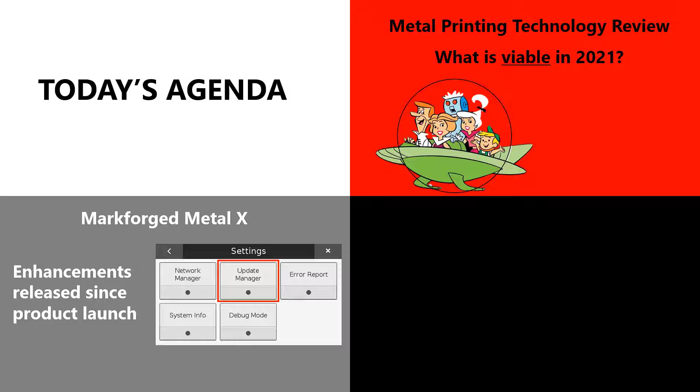Exactly, yeah. Then we're going to take a closer look at specifically Markforged Metal X and see what has changed. If you saw one of our previous videos or webinars about the Markforged Metal X and how it works, we probably talked a lot about the features that existed then. This is the updates. These are the things that have happened since then, and a lot of them are based on feedback from customers, requests from customers, and just enhancements to the system, which takes us to our last step, which is what we've personally learned so far.

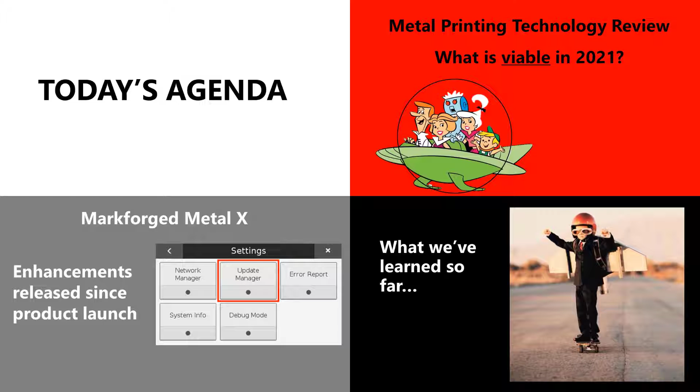Our Metal X system is down there in Dallas with Kyle, and you guys have been throwing out all kinds of parts, right? Benchmark parts. We've done projects along the way for some of the content, some of the events, but just going through the motion of that many parts, I want to interview Kyle and see what it has been like after 2 years of being effectively an additive metal fabricator. So we'll dig into some of those little lessons and insights at the end.

So as far as metal printing in 2021, there's multiple different approaches, but you can group them all into just a couple of different categories. The first is directly printing metal. What I mean by that is you're solidifying the metal as you go. That generally involves either a high-powered laser or a welder, and you're just simply solidifying the material little by little.

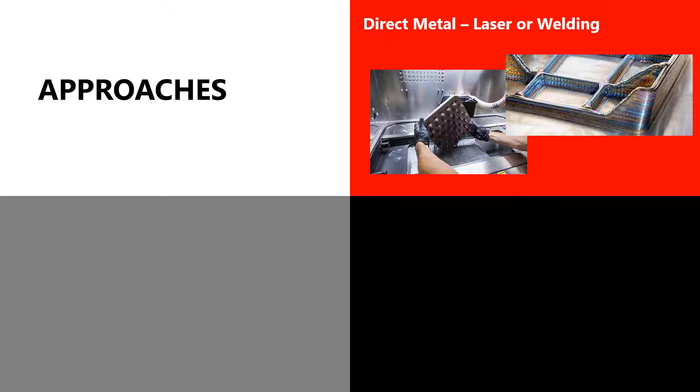I remember seeing something that looked like this nearly 17, 18 years ago. I saw a company that was doing research in laser additive manufacturing processes. These have been around for a long time, but they tend to be very expensive, and there are some other drawbacks to them, specifically with safety. So it's still a very viable process, but we'll talk about what is the current technology in that space.

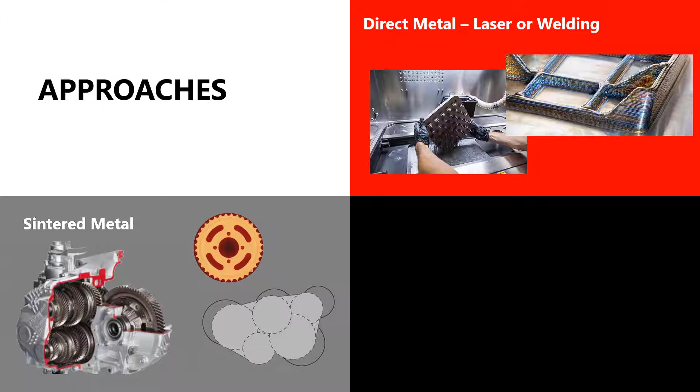And then you've got the sintered metal, and this is what's been booming over the last several years. Sintered metal is a process that takes powdered metal and merges it in an oven. It's not something that a lot of people are familiar with. You don't go down to the corner fab shop and they've got a CNC machine, a welder, and a sintering process, right? It's very uncommon for people to see that, but it's used in very high abrasion and high tolerance and precision applications, things like gears. So we're seeing that process in one form or another really being heavily leveraged in the future of metal printing.

And then the last thing, I really wanted to include this for reference, even though injection molding, investment cast and sand cast processes do not involve printing the metal. You're basically able to use additive manufacturing to make those processes more efficient and potentially more complicated. And so I thought it was worth at least including those in a lot of our discussions as reference to say, well, if this is what you're looking for, this is still a very viable option and maybe a better way to go for you, depending on your situation.

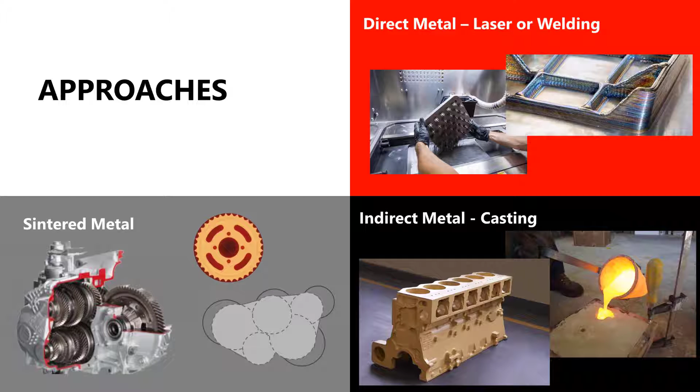For each of those processes, there are different raw materials available, and in fact, they don't all break out exactly in the same way. So you've got loose metal powder, and there's a couple different ways that you can use loose metal powder, whether you bind it selectively with a binder sprayed out of jets, almost like an inkjet printer would print and solidify it, or whether you're doing that laser melting as it goes layer by layer.

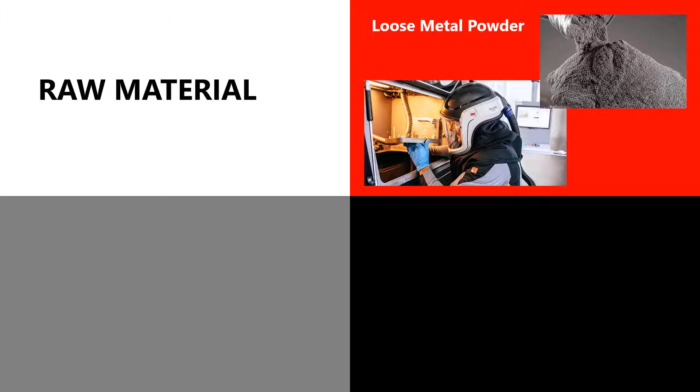Loose metal powder, as you can kind of see from that person who's wearing that ventilation system, is a potentially unsafe material if you don't have all the precautions. So you've got an explosion-proof facility, you've got to have ventilators and other specialty equipment. But because it's loose metal powder, we tend to see a lot, if not all, of the high volume metal printing is done this way.

The Metal X and some of the recent machines that have come out have been using some variation of metal powder that's in a binder when you get it. That means there's no loose powder at all being used. It's all kind of contained in some way. We use filament very much like you would with an extrusion polymer printer. We've seen some that use rods or canisters. The method of binding it and the delivery method really just determines what kind of machine you need and what kind of quality you can achieve.

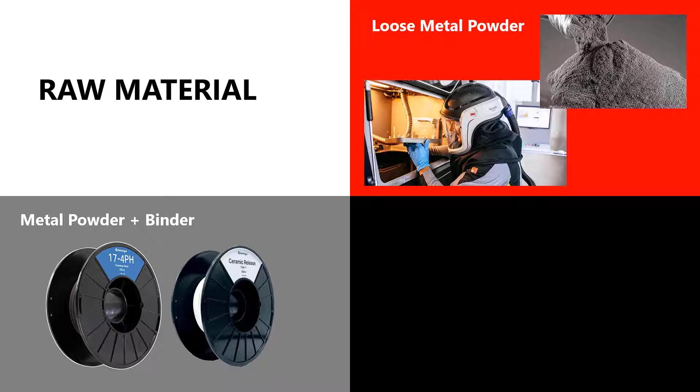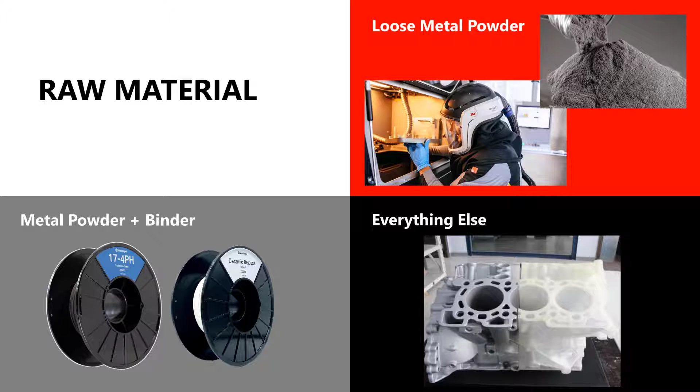But that's kind of been the big breakthrough in the last couple of years, a much safer, much lower cost printer that is able to create parts quickly with metal. And then you've got kind of everything else, right? If it's a MIG welder, if it's a lost wax process, etc. We're talking about it because it's worth mentioning, it's worth referencing, but it's not really relevant to direct metal printing. But I did want to keep it in there for comparison purposes.

So if you survey the market and you look at all the companies and all the groups claiming metal printing, you can generally group them all into these major categories. And we're going to use these to compare how everything works. So we'll start out with bound metal. That's the Metal X system. That's kind of the new kid on the block, where you have the metal all bound up.

You then have the binder jet, which is another relatively new one. And several of them are doing this, and you basically spread out a thin layer of metal powder, spray a binder in there, and it solidifies it into a bit of a delicate part that then would be sintered a little bit later. Then you have the direct metal laser sintering, which is where you're melting it as you go, but it's again using that metal powder.

You have robotic welding, which I know a lot of people talk about online when we do these types of events or we have videos out there. A lot of the comments say, where's the welder, where's the laser? Lasers are used quite a bit, but robotic welding is not used as much in actual fabrication, but we're seeing a lot in the MRO space. Then you've got investment casting, the lost wax where you're melting out the part, or sand casting where you're building a form or something like that, and then pouring in the molten material.

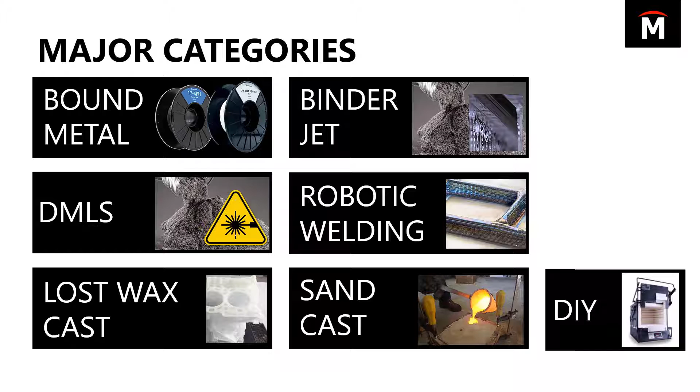Now the last one I wanted to mention is this DIY option. With the success of the bound metal category, we're starting to see some companies try to start up a DIY market for this. And we'll talk a little bit about where that's at, but it really is not a viable commercial option at this time. But it's something to keep an eye on. As we get more sophistication in this process, we may start to see a little bit more prevalence there. But for the most part, all of these processes require a prepackaged system from a vendor.

So let's start with some of the things that are important to you as a company, such as the volume of parts. How many parts do you need to make?

If you've got singles, even dozens, potentially up into the hundreds, that's where you can look at a bound metal part - that low to medium part quantity, and a low to medium batch size. You can make one part, wash it and sinter it, and get it out the door for a relatively reasonable price. Whereas anything that uses loose powder, you're going to have to fill the entire bed with that powder, which means you really don't do one or two at a time without having a lot of waste and a lot of extra time.

So what we end up seeing with a lot of them is you want to keep your part volume medium to high, and your batch size kind of has to be a little bit higher. You can do smaller batch sizes, but usually with anything that uses loose powder, that's when you're going to have somebody running that all day, every day, and that's physically their job. Just like a machinist sits at their CNC machine all day long, with a loose metal powder machine, you're going to need higher volume to justify it, just because of the nature of it.

Robotic welding is very low speed. It's just super slow. You're not going to do much volume with that. And then the casting processes, it's really variable because it depends a lot on the foundry and everything else.

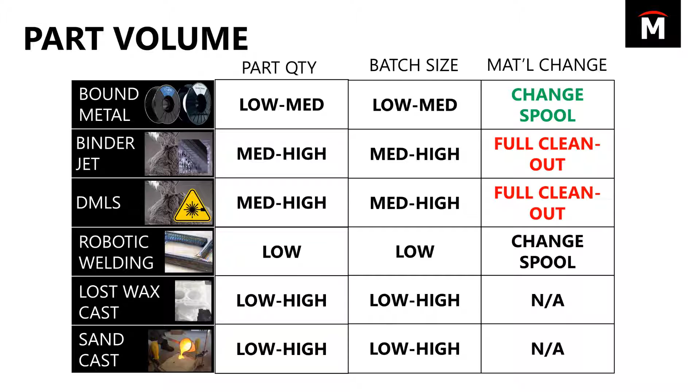Just change out the spool and you can run a completely different part in no time at all, from stainless steel to Inconel to tool steel to copper. Whereas these metal powder machines, you really need to do a full clean-out to get ready for the next material. Even if it's using things like cartridges, all of the interior must be cleaned out, and you're talking at least a full working day in order to do a full changeover of the material. So if you're very consistent on your metals, or you can pick one metal and make it work for everything you do, that's no problem, but it's something to keep in mind.

For the strength, we've got a little bit of variation depending on who you're doing it with and how they run their process. But in general, anything that's going to be sintered, like a bound metal part or a binder jet part that's fully sintered, is going to have a density and strength very similar to a cast part, possibly up to a machined part, depending on some other factors. So if you're replacing a forging with one of these parts, you may see too much of a decrease in strength. Now, the DMLS and the robotic welding, because of those heat affected zones, generally are not even as strong as a casting would be, and porosity starts to become a bit of a problem.

You're seeing on the bound metal, you can easily see well above 99% density of metal. And as you get down further, you start to get into the 95 or 90 or 80%. And then you get down into the casting - and again, that's dependent on that process.

Now, one important thing to keep in mind is that you do have the ability to do a sparse fill. That means you could take the same part and print it on all these different processes, and you would actually use way less material - potentially way less material with a bound metal printer than you would through any of the other ones. That also, though, means that the strength is going to be degraded. So depending on what you're doing, if you're worried about fatigue cracking or anything else, you don't want to be using a sparse fill, because that creates all kinds of internal intentional voids that would create a potential for crack propagation.

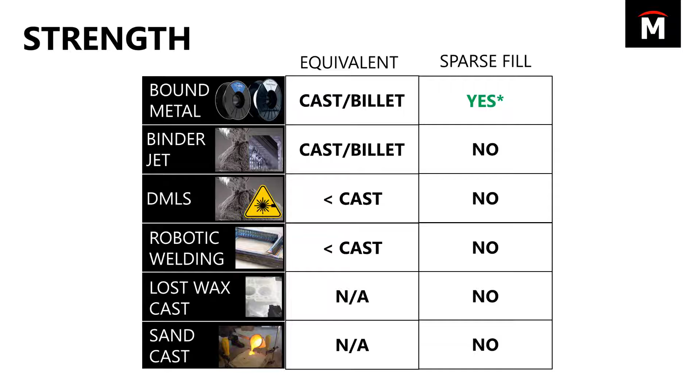The surface finish is never going to be great on an additive part. If you need something with any kind of surface finish in the micro-inch range, you're going to need to post-process this. But just having a finished part to hold in your hand that doesn't cut you and doesn't look ridiculous - most of these are going to have a fairly good surface on the exposed surface wherever the part is.

DMLS, we're finding, is not as great, but there's a lot of things that can be done by the vendor to create a really high quality part. Robotic welding really suffers, however, because of simply the nature of welding.

Not all parts are going to be exposed, or finished by the printer. In every case except for bound metal, the metal has to be cut away from the supports, and each process has different reasons for requiring supports. For example, bound metal will have a support, but because you have that ceramic release material in there, you're able to separate that part cleanly. The moment it's out of the oven, you just drop that puppy on the floor, it crumbles where the ceramic is, and it's ready to roll.

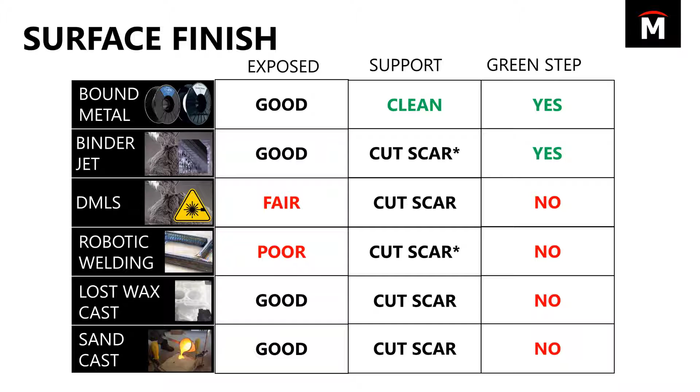As far as part cost, unfortunately nearly all of these processes are using some manner of powdered metal, and that powdered metal has to be made very specifically with very consistent size, and that extra processing step simply adds a lot of cost. That cost also has to include things like machine cost, throughput, downtime, waste, lead time, etc. But if you just compare a metal part on a lathe or a CNC machine, or metal shapes, versus anything metal printed, you simply have a much higher cost for the raw material because of that extra processing step.

Now there's some waste involved, but it's important to understand how that waste is handled. In the case of bound metal parts, we usually have a raft, or at least some kind of support system that holds the part during the sintering process, that then gets separated. That raft can be recycled, but it can't just be fed back into the machine as new material. It has to be sent off to be recycled like any other industrial metal. But because you have sparse fill, you could make the same part as any other machine, but with way less metal required to build that solid part.

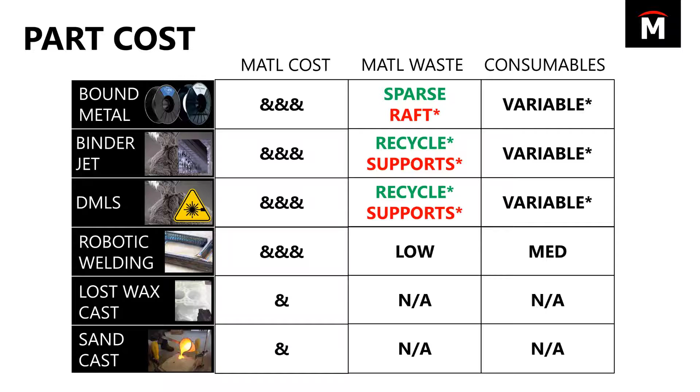Infrastructure is also an important thing to keep in mind, and this is going to vary depending on who you are. Starting with the casting process, if you already do investment casting or sand casting, this is a no-brainer. You should be using additive to support those processes. That'll make you so much more efficient and do great things for you. And if you already have bandsaws and EDMs and other machines necessary to cut away any supports or any fill runners and stuff like that, that's going to be super easy.

Now, if you don't have a metal shop where you have machines specifically set up to cut metal, specifically hard metal like stainless and tool steel, then you're going to have to think about whether you're going to be willing to buy all of that equipment to go along with it. The bound metal parts do not require any cutting other than any post-processing you might want to do on a CNC, but every other system is going to require some cutaway in order to release the part.

Now, in the binder jet, I say yes and no. Again, I'm talking about the infiltrated part versus the solid sintered part. I'm going to show you that here in just a second. But on top of needing additional facility infrastructure for cutting the supports away and any cleanup that needs to be done, you're also going to have safety requirements, floor space requirements, power requirements. Sometimes you're just literally going to have to build out a special facility built for this very purpose.

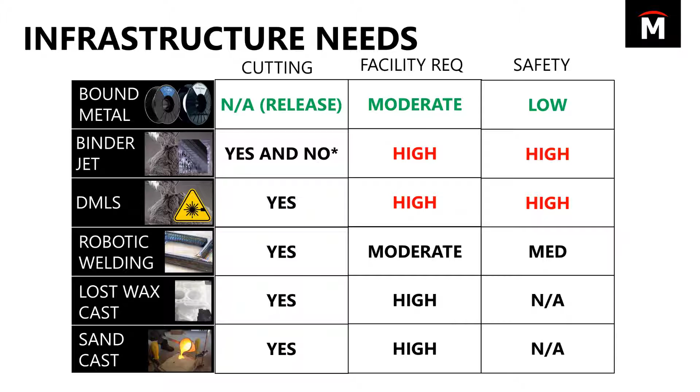So if you don't want to build out something really big, a bound metal part is definitely a great thing to look at. With the binder jet and the DMLS, the facility requirements are pretty high, and so are the safety requirements. You're really going to want to keep an eye on that and make sure you fully understand what's going to be in for every dollar you invest in the piece of equipment. How much are you also going to have to pitch in to get your machine, your facility ready? Some companies are going to be ready to go right now, and they can just install it into their existing production floor, and others are really going to have to build up around that.

Now, we talk about the support and the metal cutting requirements, and it's really important to know that some companies out there are really glossing over the difference between two different types of finished parts. So the part on the top left here, that's a Metal X part. The surface finish looks a little rough, but that's just the striations at the edge. It's very solid in the middle, but there's a ceramic release layer underneath the part and on top of the raft, and that supports it fully.

And even as it shrinks in the oven and does some really funky things going on there, that raft does a fantastic job of holding everything in place and keeping the dimensions very, very stable through the process of sintering, and then it just releases once it's done. Now on the right is a part that might have been done with DMLS or some other process where the supports are attached. Notice the supports are in the interior hole, underneath inside the ribs, underneath the overall part. They're kind of all over the place, and you're going to have to go in and clean up and cut away all of those connections on all those support locations.

So that's what the metal cutting looks like. If you see a company that claims to be able to do a part like the part on the bottom left corner, but they claim that supports are not required, they're probably actually talking about infiltrated parts. Infiltrated parts have a 60 to 90% density of, let's say, stainless steel or tool steel, but then they're infiltrated up to 90+% with brass or copper, which is great if you're trying to create a bearing or something like that where you want to impregnate and infiltrate that part. But it is not a full strength metal part.

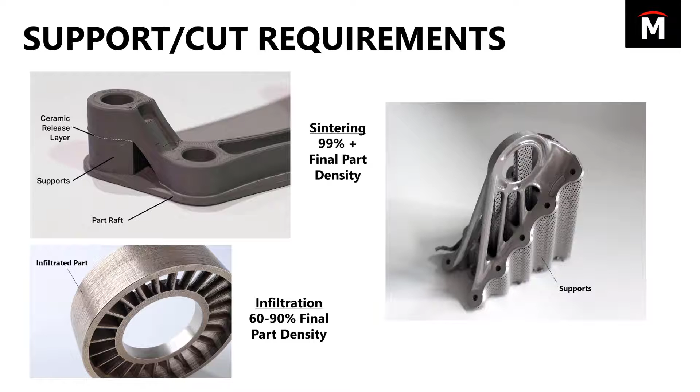Markforged cannot create parts to be infiltrated. They have to be sintered to full density. So that is a limitation of what we can do, but it also means we can't say you don't need supports here, but you do need them over here.

For the cost of the equipment, that's really what the Metal X did for the market more than anything else - they brought the cost down by an order of magnitude. You're in the hundreds of thousands range rather than the millions of dollars range for anything involving a loose metal powder.

With respect to the number of steps, that's another thing we see a lot of people talk about. They say, well, that seems like a lot of steps - you have to slice the part in software, then print it, then wash it to debind it, and then you have to sinter it. That gives you a practical lead time of about 3 days from idea ready to go to part ready to install.

If you compare that to some of these other options, they can at least have the potential to go faster. But what's important to keep in mind is with binder jet and DMLS, you have at least as many steps, if not more steps, involved.

With binder jet, you've got to print it, and it does print much faster because it's that loose metal, but then it has to cure the binder inside the build unit. Then you have to clean the parts out, clean away all the extra material to get it recycled. Then you've got to cut the part out, and then you either have to sinter it or infiltrate it to solidify that.

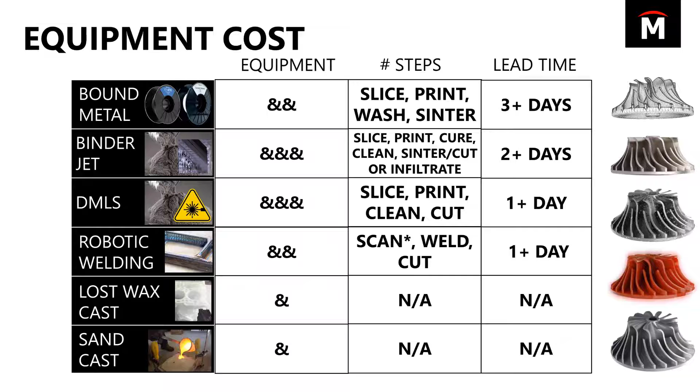So if you take all this together and look at each of these different steps and processes, they really do shake out for different purposes. Bound metal printers, very much like the Metal X, are almost always going to be lower volumes - prototypes, fixtures, small batch production, any kind of repair or maintenance operation where you need a stainless steel part with a decent amount of complexity that normally would have required quite a bit of expensive tooling. You just want to build that part and get it into service right away.

That's a great way to do it, but you're not going to take it really high up into full production. There are ways to scale it, but keep in mind, it is not designed to be running hundreds and hundreds of parts.

If you need to do that, you've got to bite the bullet and go up into the powdered metal. With both binder jet and DMLS, you're talking about a serious investment, millions of dollars to get going, but it will do everything that the Metal X would do - prototypes, fixtures, small batch, but also full production. So anytime you see aircraft companies doing full production, like fuel injectors for jet engines, it's generally being done through a powdered metal part.

Robotic welding, we actually see that a lot in repair and rebuild, especially with companies that are taking wear parts, really large wear parts, and they'll build the material back up and fill in any damage or wear surfaces, then machine it back down to its original spec. So all they have to do is rebuild the wear surfaces - the rest of the part simply stays the same. Casting is going to be done by companies that have the ability to do casting.

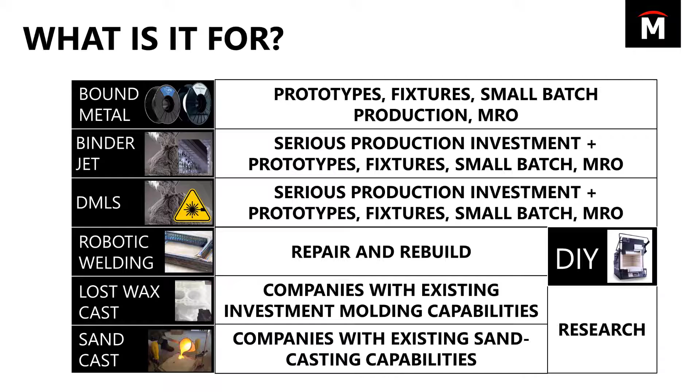So if you see someone out there that says they're going to do DIY metal printing, they're really, really stretching right now. Now that's not to say that that's not going to be very possible in the next few years, but there's just huge gaps in available knowledge and information, and there's just nobody that I've seen doing anything successful that didn't have some kind of a PhD or didn't make this their number one priority, which was just printing parts themselves. So let's talk a little bit about what's changed since release.

We've had a lot of stuff improve since the material list was released. We started out with primarily stainless steel and a little bit of tool steel when the Markforged Metal X was released. We've since introduced Inconel, copper, and some additional types of tool steel.

Inconel, extraordinarily tough, strong, corrosion resistant. Copper is a very tough material, very hard to machine, great for heat sinks, electronics, welding applications, things like that. We're seeing some really awesome applications for copper.

And then the various tool steels, we're starting to see people build bespoke custom CNC tooling and things like that out of these tool steels that are really some fantastic material. They're all using the same release material. They're all going through the same machines. They all have to be sintered one material at a time, but they all can be made on the same machine pretty easily.

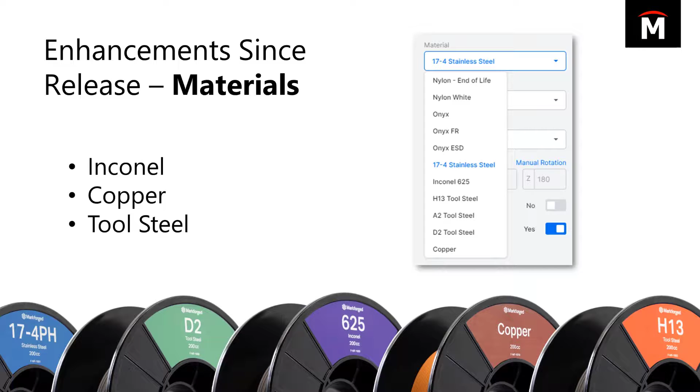Another one is the options on the print. For example, the raft, if you don't want to use additional material underneath it for raft, you can just turn raft off and say just print it just by itself. It does kind of drag a little bit on the surface of the sinter plate, so you definitely have just a tiny little issue with that. But when you're really looking to save a lot of material, or you don't have a lot of accuracy requirements on that bottom face, skipping the raft step is a totally viable option.

We've got a smaller layer height option for more accurate parts. We can also do chunkable support. We figured this out pretty quickly when we did parts that had either internal or external threads. The supports themselves created a helix, and that helix could not be separated from the surrounding part. So with chunkable support, it creates little cuts, and it just impregnates various different breakpoints with that ceramic. And so what you got to do is just hit it, and it starts to pull apart all those structures into individual small pieces, rather than it trying to be one solid support block.

We also have a couple new ones. Sinter stability, which is described as maybe sacrificing some of the surface finish, but to create a part that is much more stable in terms of dimensional accuracy after the sinter, as well as leak resistance, which is a specific way that it prints to make sure that it gets a very tight seal on all ceilings and walls. That way, if you have any internal pressure on the part, there's not going to be the possibility of a very small, included crack or something like that in between the layer lines where it might be able to leak.

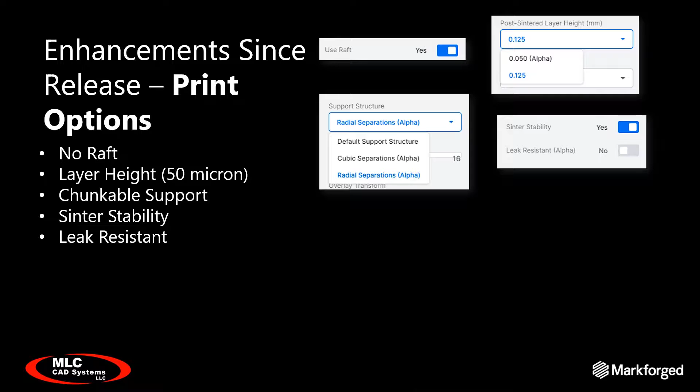You have the ability to do solid infill or sparse fill, so you can make the part much lighter weight, or you can make it full solid if you need full strength. And exposed infill means that you can print with the infill visible. A lot of times you might do that for just kind of demonstration purposes, but it's also really nice if you want to kind of expose that sparse fill to fluid or some other kind of a thing.

We have variability in the wall thickness on the floors and the walls. That makes a really nice part that would be post-processed on a CNC machine, either a lathe or a mill, because it's got a lot of extra meat there that can be machined away down to the final tolerance.

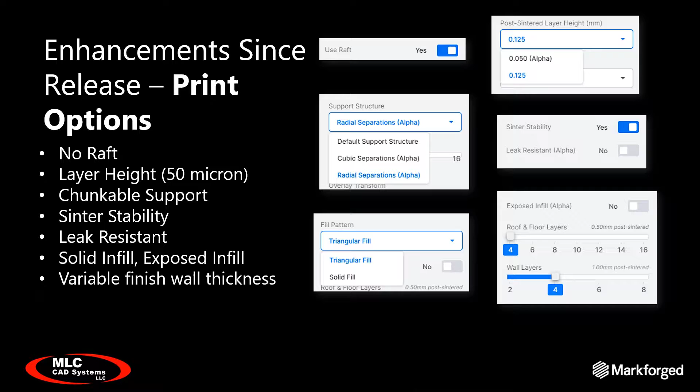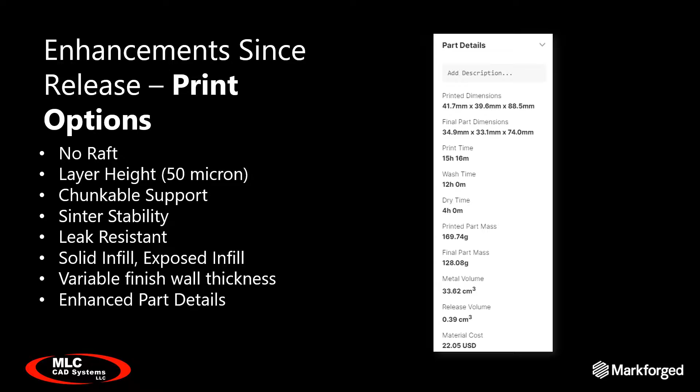We also have some additional part details. It used to just be the print, wash, and dry time and the mass. Now we can look at what the part dimensions are, both before it gets printed and after it gets sintered, the mass with any raft and other support material, total volume, total material cost. You get a lot of great details depending on what specific process parameter you're trying to look at the data for.

The processes themselves have been upgraded, so coming from the software, we have the ability to print a lot faster. There are a lot of improvements in the way that the machine is pushed and the way that it's programmed to be able to get your parts out faster. The estimates on how fast it's going to print, as well as the amount of time it takes to wash and sinter, are more accurate and faster.

In some of the major releases, we saw some huge reductions in wash time and sinter time due to ongoing R&D, meaning that they may have figured out they can cut 10 minutes off here and 10 minutes off there and maintain full part quality. They would push that out as an update. And even first generation machines are going to run just as fast as a brand new one that you buy today.

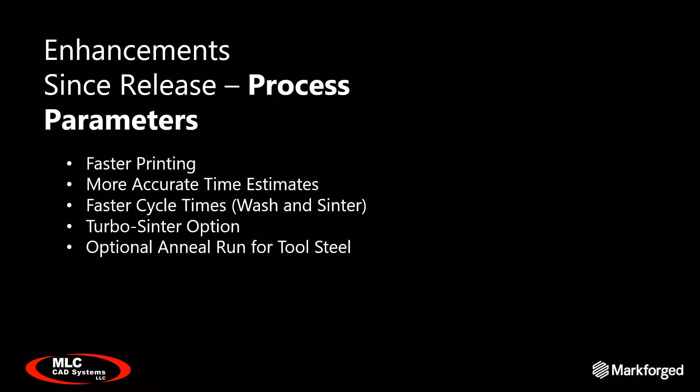There's a new turbo sinter option that allows you to sinter in a very short amount of time. And then for tool steel, at the end of the sinter process, you can have it do an anneal run, which will anneal it to a much softer material so that you can machine it to its final tolerances before being re-hardened again up to full strength.

We have a new printer oven, the Sinter 2. The Sinter 2 has a much bigger opening. With the Sinter 1, the volume was about the size of a loaf of bread inside. With the Sinter 2, you have multiple shelves that you can fill with parts so you can get a lot more volume. Or if you have really large, bulky parts, those can go in there and get sintered. And if you have external sintering capabilities, you can just skip the process within our system and get that part solidified elsewhere.

The software has been upgraded in some very substantial ways. Blacksmith is a revolution in terms of accuracy and precision. The parts are going to shrink a little bit when they are sintered, but they are very predictable. That's why we're able to use sintering processes for things like gears and gearboxes, because it's a very predictable shrink. As long as you know what it's going to shrink to, you just back that up, print undeformed, and you'll get exactly what you expect.

Blacksmith uses artificial intelligence and scanning to allow you to create a part, print it, scan it, and teach the AI algorithm what it's going to do when that part gets sintered. That AI algorithm can then better predict what the part needs to be shaped like in order to get the exact final requirements. For example, if a part always grows by a few thousandths when sintered, Blacksmith would be able to capture that and offset it. So the exact same part gets more and more accurate every time you run it, and it benefits from other people who run that scanner as well.

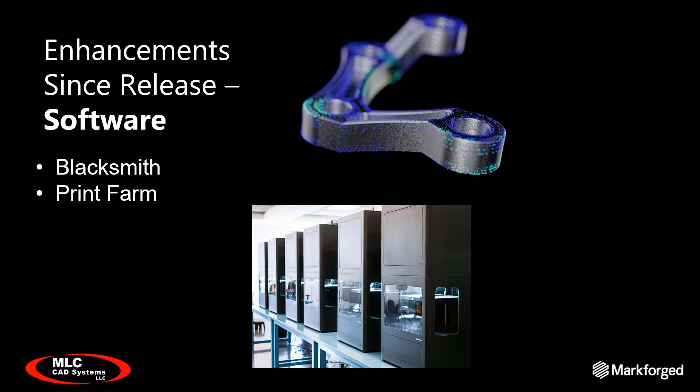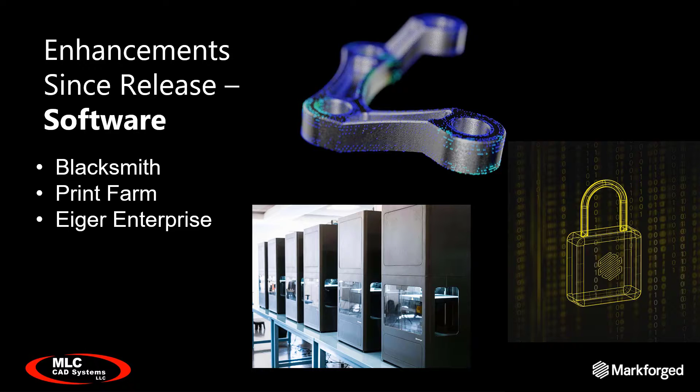And then we have Eiger Enterprise along with the security certifications. With those, you start to look at some really granular security and permissions across all the different parts, pieces, and processes. And you can really be sure that your intellectual property is safe when it's stored inside Eiger.

So Kyle, let me bring you back in. First of all, make sure that I didn't say anything out of turn. How did I do on all that beginning part as far as the state of metal printing and what Markforged has changed since release?

Yeah, I think you've pretty much hit the nail on the head. It has been a learning process. We're still talking about a technology that's really in its infancy. We have learned some very valuable lessons, which brought all of those enhancements that you talked about, right? Some of the things we've learned as far as applications, you really kind of touched on it. The low volume, one-off jigs, tools, fixtures kind of things are really where Markforged Metal X hits the sweet spot.

What we've really learned is, hey, this isn't laser sintering. We aren't laser sintering. We don't do the things that a laser sintering machine does, or an infiltrated part. This doesn't fit every application. What we've really learned is, don't try to twist it into those applications that it doesn't really fit. Very early on, we had a lot of people interested in the Metal X with applications that just didn't fit.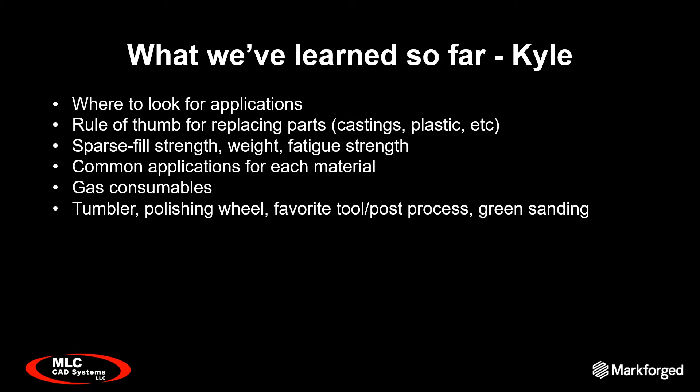Yeah. Very good. All right. Well, Kyle, I appreciate your help here providing some perspective. We're going to open it up for questions and see if anybody has anything they want to learn a little bit more about, or have any specific questions about the Metal X process, or just metal printing in general.